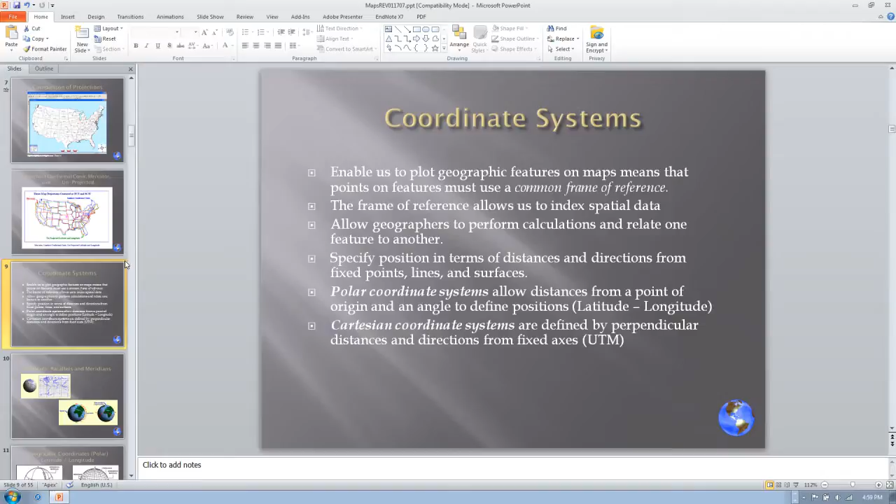There are 2 different coordinate systems that we work with in GIS. The first is polar coordinate systems, and the graticule that we see on globes today was developed by the Greeks, and it enables us to plot points in degrees of latitude and degrees of longitude - latitude north-south, longitude east-west - for any point on the planet.

And if you have 2 points, you can hypothetically calculate the distance between them, hypothetically meaning if you knew how to do the trigonometry involved. That's a complex calculation because lines of latitude run east to west - latitude is a north-south direction, and they're parallel. But lines that demarcate longitude run north-south, they're called meridians, and they converge at the pole. So just knowing that, a degree of longitude at the equator is its greatest distance, and as you move north or south from the equator, a degree of longitude decreases until you get to the pole, where all those meridians converge and a degree of longitude is basically nothing.

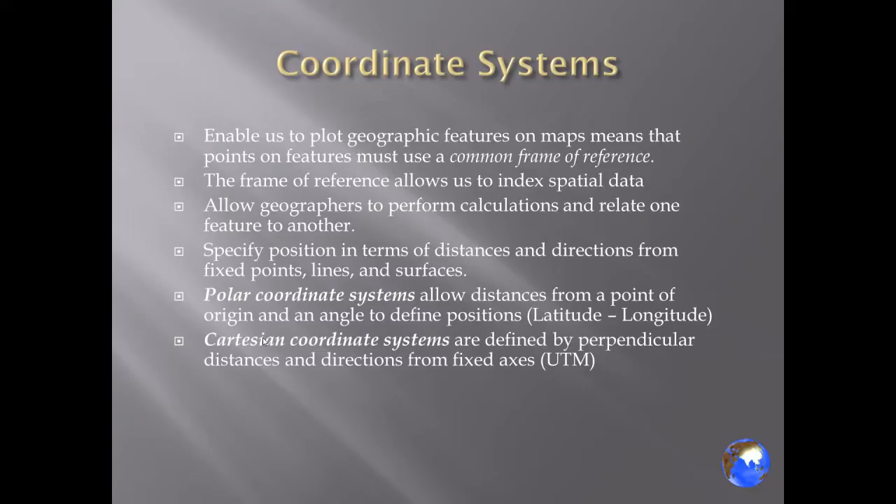The other coordinate system we use is a Cartesian coordinate system like UTM. They are defined by perpendicular distances and directions from a fixed x and y axis - you remember this from your good old geometry days. The x-axis for UTM is substituted by easting, that's the horizontal. The north-south axis, the y-axis, is northing. So we can plot points as long as we have an x and a y, an easting and a northing. We can plot those points.

Moving to this slide here, you see 1 degree at the equator is 111 kilometers or 69 miles using latitude and longitude. By the time you get to Washington, D.C., it's 88.8 kilometers or 55.2 miles. So therein lies the geometry and the trigonometry you need to calculate that.

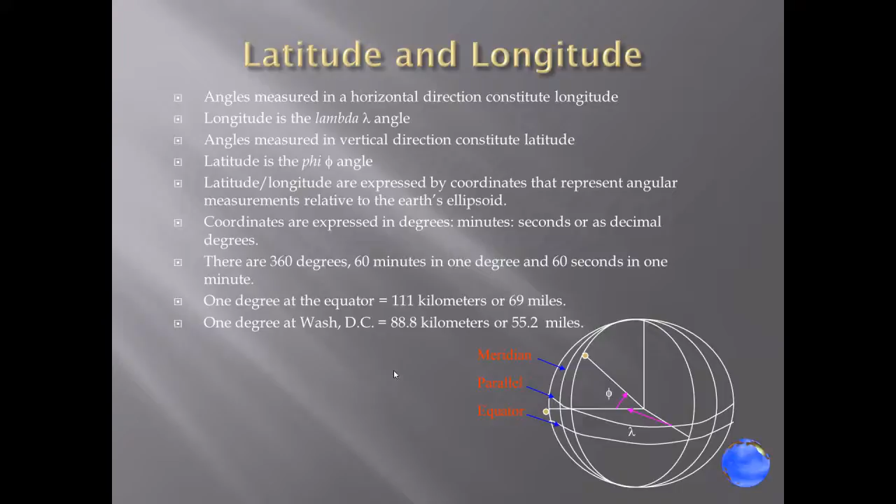This is a universal transverse Mercator grid. There are 60 zones running from east to west, and they run from approximately 80 degrees north to 80 degrees south. They're vertical in nature, and here's Alabama - we are in zone 16. Here's the Yucatan Peninsula, you'll see it's in 16 and part of it's 15.

Northing is meters north of the equator. In the case of Dzulá, it's 2 million some odd meters north. That means if your stride was 1 meter, you'd have to take a little over 2 million steps to get to that point. Very simple and straightforward.

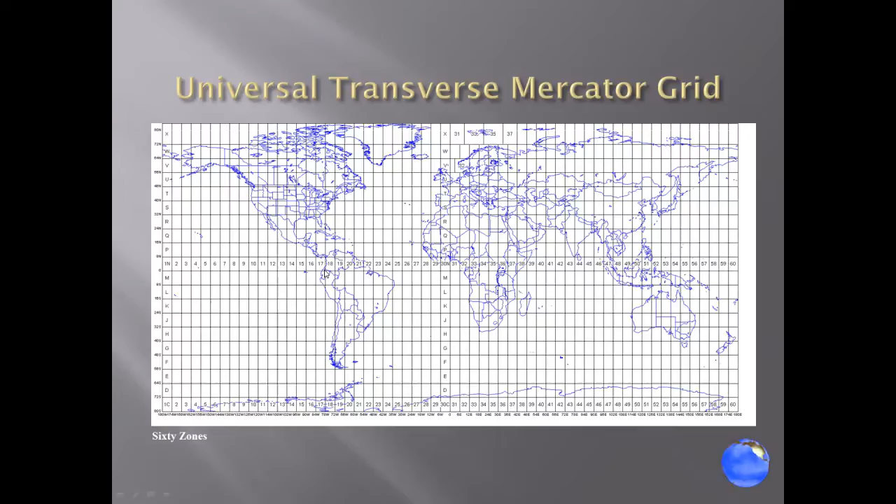The other rule of thumb is that easting increases as you move east and decreases as you move west. Northing increases as you move north and decreases as you move south. By the way, if you're in the southern hemisphere, this is considered 10 million instead of 0. So northern hemisphere, it's 0 and counts upward. Southern hemisphere, we start at 10 million and subtract off. That's Universal Transverse Mercator. I think that's enough of that.

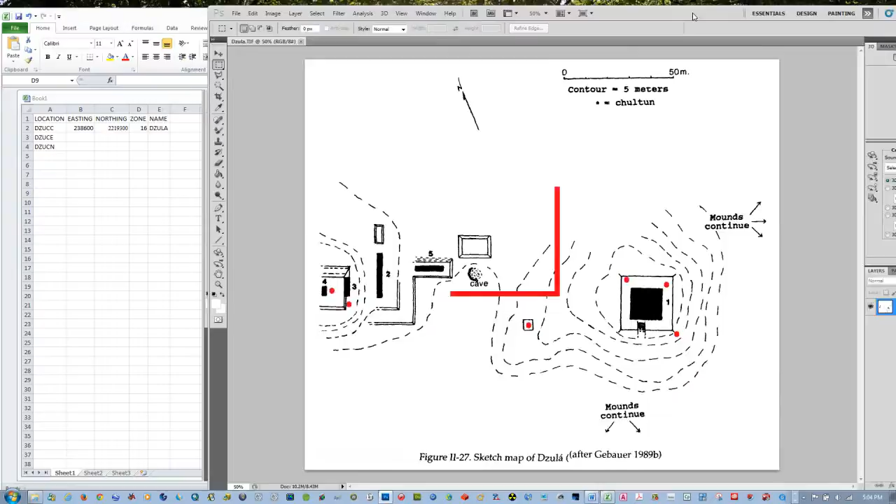Let's take a look at Dzulá. I know I have that open. There you go, I'm going to have to scoot some of this stuff out of the way so you can see this. Okay, maybe we'll be able to see this. Let's see, a little bit more. Okay, so Dzulá center: 238,600 east by 2,219,300 north. That's that point right there.

If we want to know the easting for this point, which is Dzulá north, we're not moving any additional meters east or west of this center line. So the easting for this point up here is going to be the same as the easting for center, center. So I'm going to go down there and type 238,600. The northing for this point, remember the scale is 50 meters, so the northing for this point is an additional 50 meters because we're walking north. There's your scale bar. So the northing would be 50 meters more than 2,219,300, so it's 2,219,350. That's the northing. This should plot a point right here.

The Dzulá center easting—okay, if we're going from this point, traveling to this point, and this is north, then that has to be west. If this line is 50 meters, then going west 50 meters means we have to subtract 50 meters off of the easting of the center. So 238,600 becomes 238,550. Are we moving further north or south? No. So the northing for this point right here is going to be the same as the northing for that point right there, which is 2,219,300.

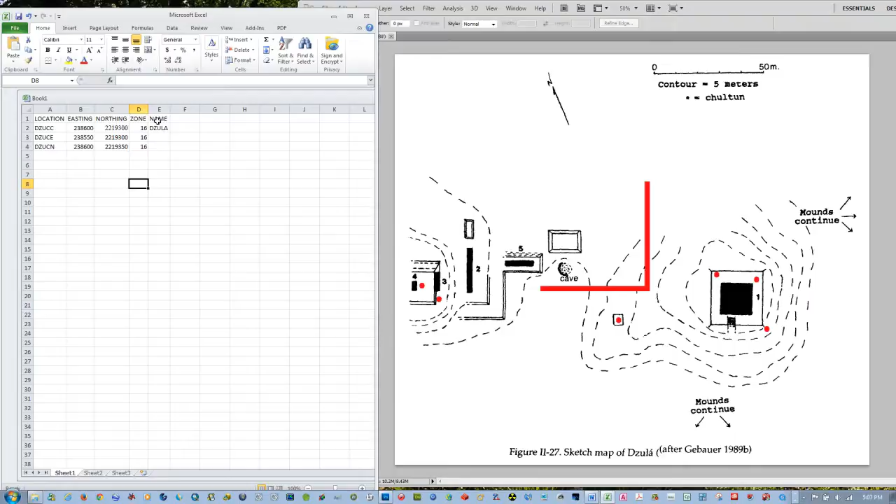Okay, we'll type zone 16 in all of them. We're not going to use that for a label, we'll need Dzulá. Okay, I think we're ready to geocode this. So I'm going to close this and label my sheet Dunning.

Let's make it Dunning underscore sites. Sheet 2 I'm not going to use, so I'm going to delete that, and sheet 3 I'm not going to use, I'm going to delete that too. We need to save this, but we need to file save as. You all know GeoMedia will only take Excel 97-2003, so we want it in that format, and we want to put it in our folder for Lab 8 on the C drive. So we go to Lab 8, and let's call this one Dunning. Okay, so we should be good to go.

This should work, hopefully. And by the way, you need to close this to attach it. Okay, let's open up GeoMedia.

We're going to open up a blank Geo workspace, and we're going to make a new connection. We're going to connect to Yucatan. Browse, go to the Lab 8 folder, Yucatan 3 MDB. Okay, let's go ahead and display country.

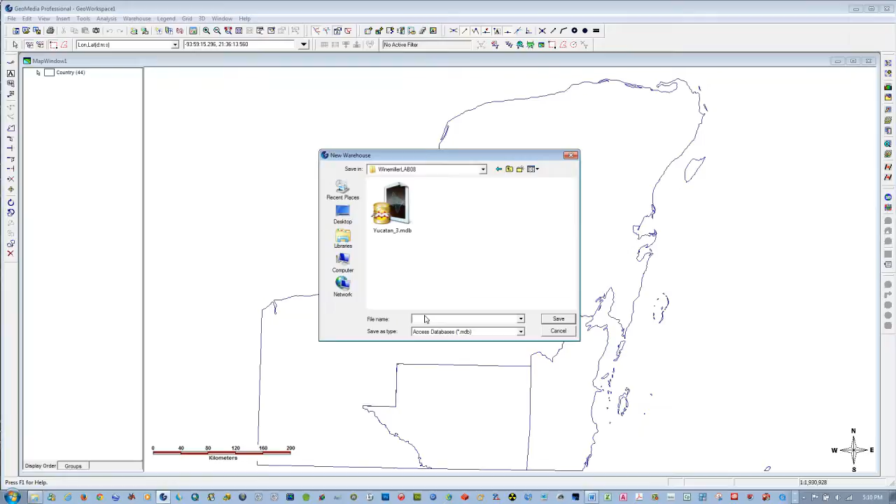Now what we want to do when we geocode coordinates, we have to attach a spreadsheet. We could actually key in coordinates, but that's not really the best way to do this. Let's go ahead and attach the spreadsheet. We do that by going to Warehouse, Feature Class Definition, Dunning, Attach. Here, when we attach, it always asks what format of data we're attaching.

It's Excel 97. We'll browse. We have to go to the Lab 8 folder and pick up Dunning XLS. And there it says Dunning Sites. That's why I deleted all those other worksheets.

I don't know why it puts that little tail on there. Well, I do, it's an underscore. If you have 2 or 3 sheets that are named the same, that underscore will be followed by a numerical value for the number of sheets. So we're just going to attach Dunning Sites.

If you want to see what it looks like, we can go to Edit, Attributes, and there's the attributes. It has a location, an easting, a northing, a zone, and a name. That's a text feature. So everything so far is pretty good.

Now what we need to do is geocode those coordinates. So in order to do that, we go to Analysis, Geocode Coordinates. Geocode attributes in, we want to pick the spreadsheet. Here, the first time you geocode coordinates using UTM, you have to check the coordinate system.

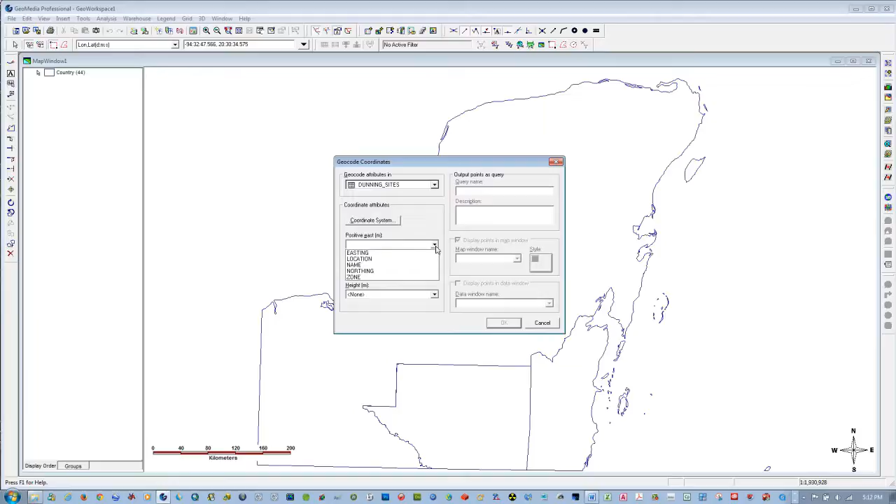Now you'll notice that instead of latitude, like when you're geocoding schools and churches, it's asking for positive east meters. Easting, that's easting. Positive north meters is northing. Now we got this green dot, let's change it to red.

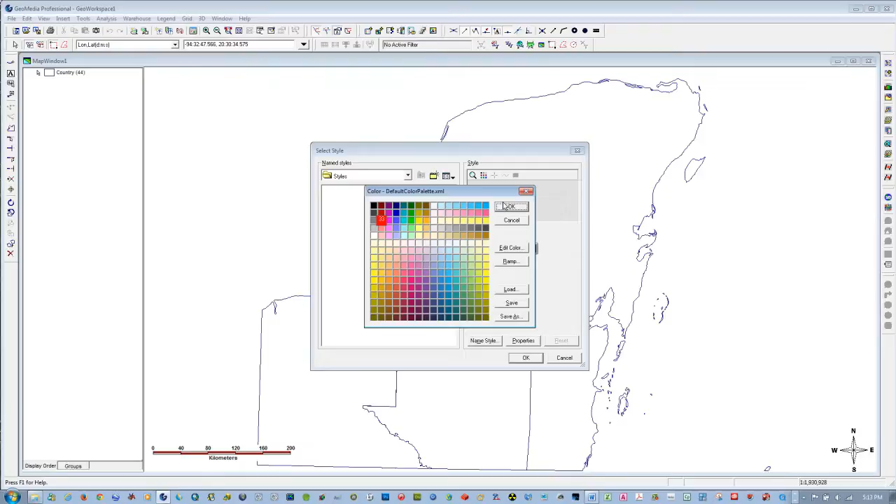And we're going to display it in the map window. We really don't need to see the data window. And voila, there's the points.

Now, if we would zoom in here, we would see that they are in the configuration of the scale center that I put in the map. In order to do that, let's just go ahead, display all on the country, and fit all. And you'll notice we have 3 points, and they're in the right position.

There they are. So we could actually move that over. If, in fact, you do this and you find out that this point is down here when it should be up here, or this point is over here when it should be over there, you made an error in the calculation of northing and easting.

Be cautious of these maps because some of the maps have a 50-meter scale, some of them have a 100-meter scale, and some of them have 20-meter scales. So you have to be aware of that when you're doing the addition.

These are correct. So now I need to get Dzula interactively in here. To do that, insert, interactive image, browse. We're going to go to the C drive, Lab 8, and I'm going to pick Dzula TIFF.

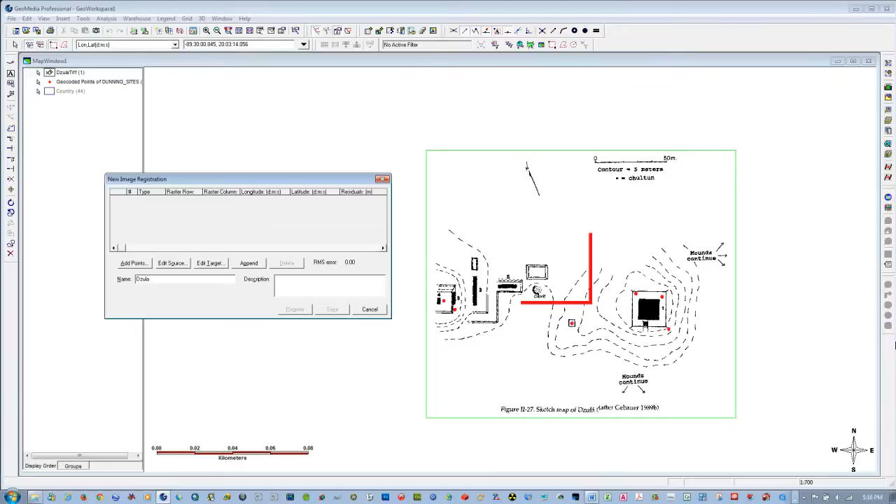I believe in the lab, I'm asking you to do 4, georeference 4, maybe. You might want to georeference all 10 of them. I believe there's 10 of them. There may not be quite 10. Once we have it named, add points.

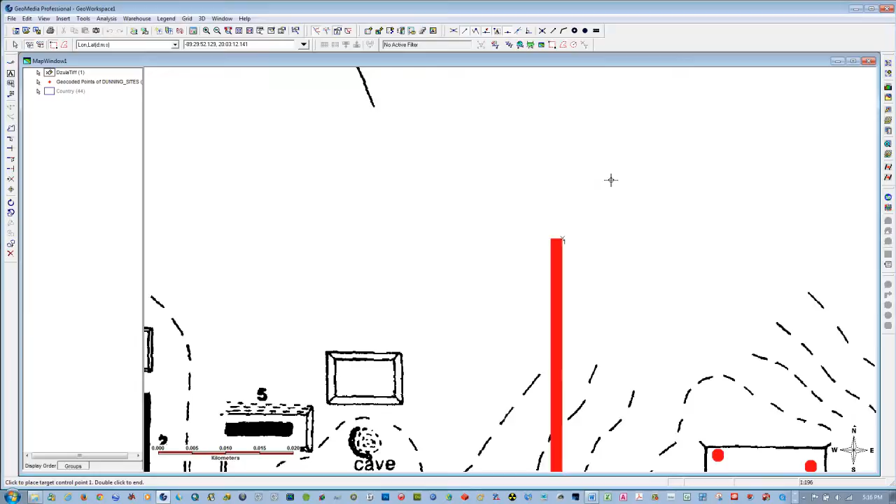Now you notice we have the bullseye crosshair with this snap tolerance. Let's be a little accurate. I zoomed in, right click, and I'm going to get right there. Left click once. That's my one, fit all. And I don't even have to zoom in. Watch this, I just get near there and I get that A. It's going to snap onto that point, it's within snap tolerance.

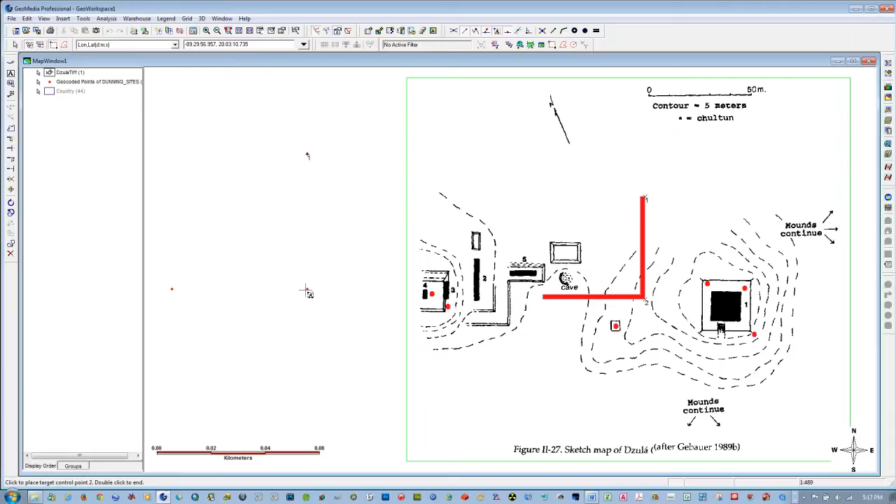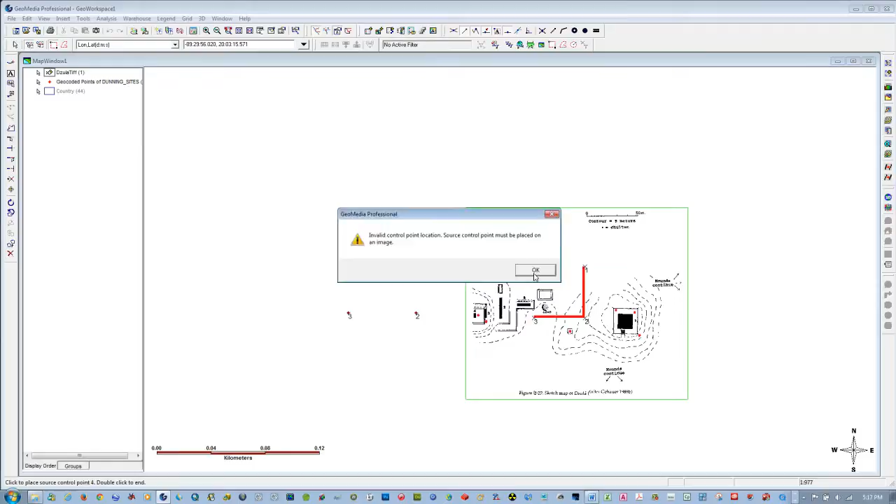The next one, that's 2, don't have to zoom, there it is. 3. Fit all. 3. Okay, I'm going to zoom out a little bit. Right click, double left click in the white space. I had a little spastic click there.

You're never going to get a residual with only 3 points. It has to have 4 to calculate residuals, so the residuals look super. They're 0. Everything looks good.

Let's go ahead and register. The map popped over there. Let's change the color of these points to blue and push them up above the map and see how good we did. Look at that, perfect. So now this is georeferenced.

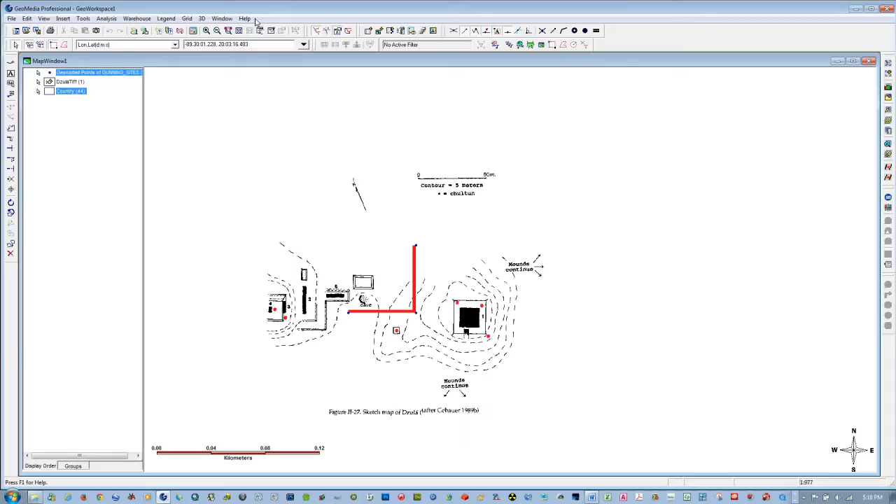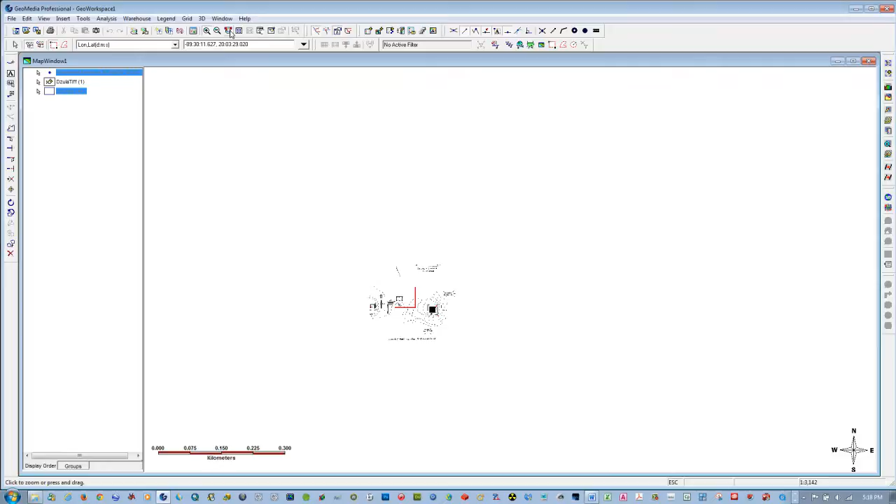We could turn back on the country and fit all, and you'll notice that Dzula, in fact, the map is covered by the point features because they do not change. But if we zoomed in, ultimately we'll see Dzula. Okay, so let's display off there, fit all. And now I'm right clicking, or escaping, to get out of zoom feature.

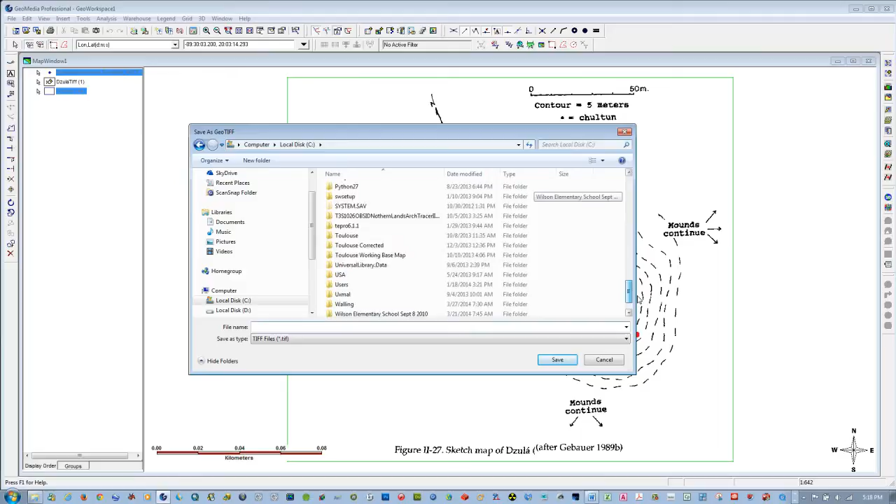I want to make this a geotiff, so I left click, it's highlighted, warehouse, output to geotiff, and we're going to go to C drive. It was going back to lab 6, that's the last time I did that. And it is Dzula, so why not just click on Dzula once, left click, and call it Dzula GeoTIFF

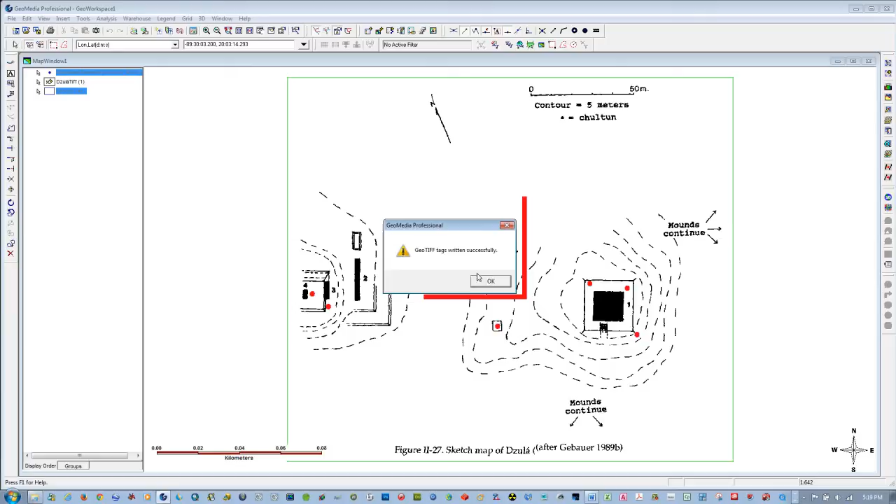and save. GeoTIFF tags written successfully means that it was output okay. If you get an error message that says output of GeoTIFF is not supported by this projection, go in and change the projection to something else. UTM is a safe one. I believe Albers equal area is a safe one. Cylindrical equirectangular is probably the one that it doesn't support, is unsupported. Why is it unsupported? Because it's not able to do the trigonometry involved in warping this feature.

Okay, I'm going to turn this feature off, and I'm going to insert a georeferenced image. Automatic is the mode, you don't have to. You could change the geotiff, but leave it automatic, that way it recognizes anything. Browse to the C drive, go to Lab 8. Only click the folder and go OK. And here's Dzula geotiff highlighted.

Arrow to the right. If you get a warning message here, it's not a geotiff. We're going to put it in Dunning, and we want to call it - see, DzulaTIFF is already up there, that's the last image we interactively replaced. So we want to name this something else, and it's Dzula GeoTIFF. And add a new legend entry. If you don't check that box, nothing will happen. You can apply to see your work, and OK or close. And there you go, so now that's in there.

So we've georeferenced, we've taken a map, a sketch map that had no geospatial value in a GIS. We innovatively calculated 3 points of UTM coordinates, and we were able to georeference this.

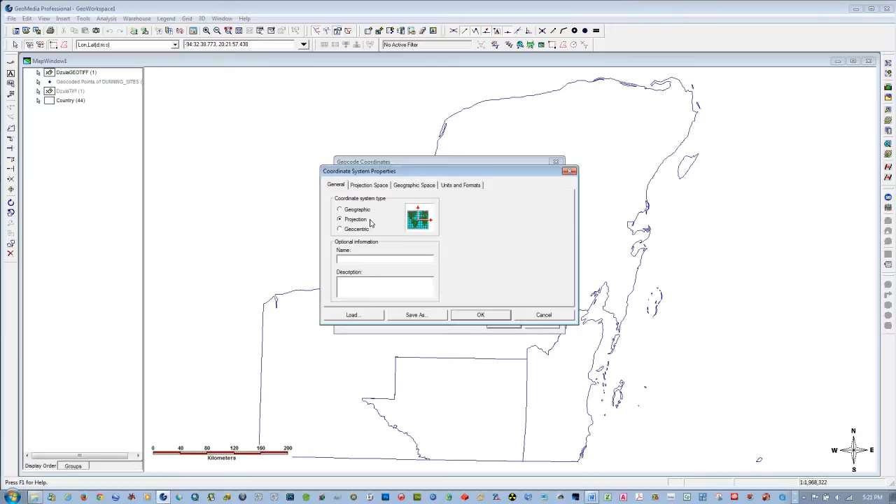I'm going to geocode the same coordinates for Dzula, but I'm going to make a mistake and geocode them with the wrong UTM zones so you can see what happens. So I'm going to go to Analysis, Geocode Coordinates, Dunning Sites. Now you notice I've got to click on the coordinate system in the projection space, projection parameters.

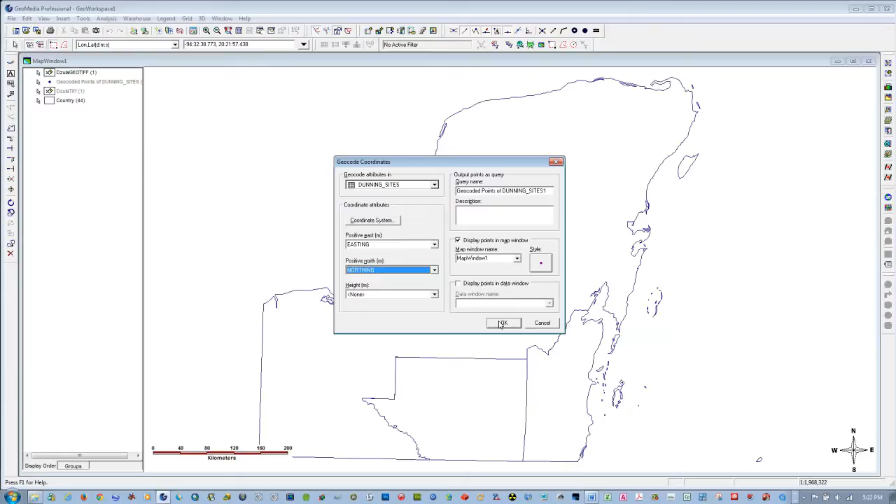I'm going to take this back to 15. Okay, let's select the easting, select the northing. Remember, there's a redundancy here, and there'll be that. Let's click OK and fit all. And you'll see here's where they are, they're over here now in zone 15. So that's the functional equivalent of the northing and easting we have for this particular site down here.

And I'm not going to move them up above because I'm going to show you how to fix some errors. Well, let's actually just delete this.

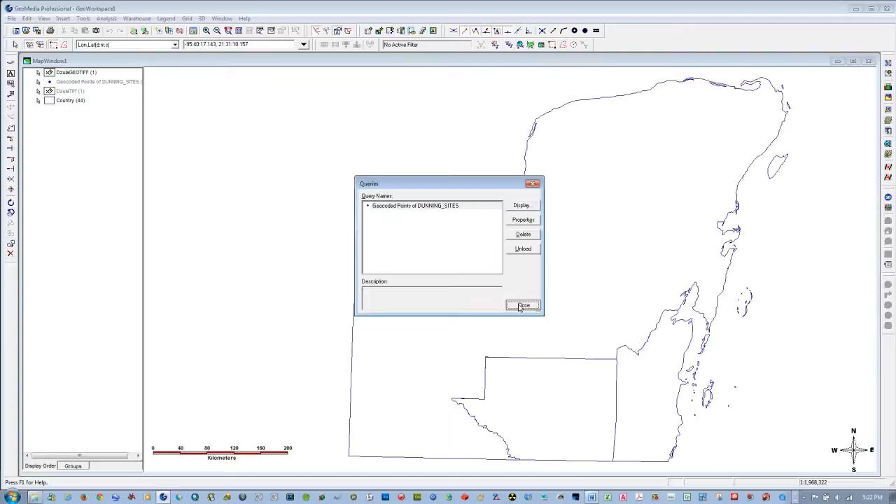And that's a query. So if we went up to analysis queries, this is it right here. I'm going to delete this. Okay, close. Now what I'm going to do is I'm going to push these up here.

So there's our points. I'm going to go in here and show you the map. Okay.

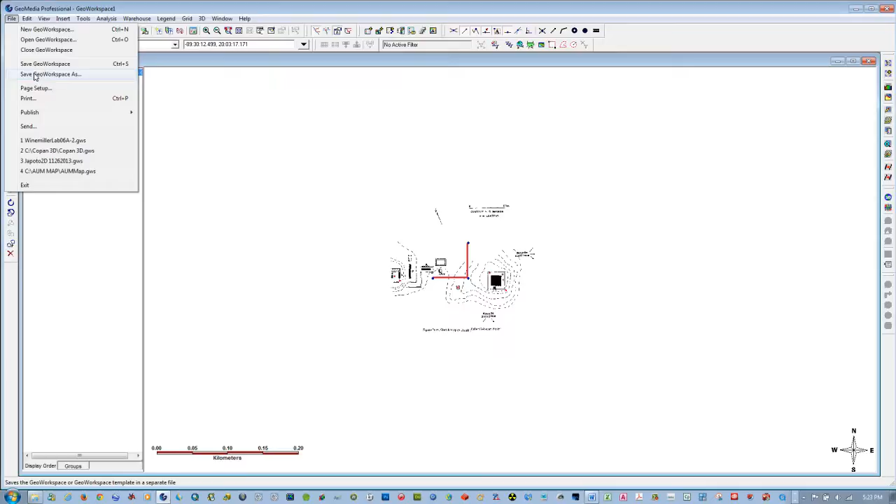What I'm going to do is I'm going to save the Geo workspace. So File, Save Geo Workspace. Let's put it in our folder. It's got to go in the Lab 8 folder.

And you're going to call it, well, you're not going to call it Winemiller. I am. Lab 8.

Okay, so it's saved. Now what we want to do is I'm going to change the easting of this point right here. I'm going to add 50 meters to it.

So we're going to close this. I'm going to go into the folder. I'm going to open up Dunning Sites. And that was Dzula North.

Instead of 350 - oh, that's northern. Easting, I'm going to make this instead of 600, I'm going to make it 650. Just to impose, to insert a mistake in there.

And I'm going to close this. Now I'm going to double left click and open up GeoMedia again. Now you'll notice that that point moved over to here.

This demonstrates a couple things. One particular situation that it demonstrates is that when you have attachments in GeoMedia and you go through any kind of analytical function like geocoding coordinates, whatever, when you launch GeoMedia, the Geo Workspace, it goes through and accomplishes all of those tasks in order every time you open it.

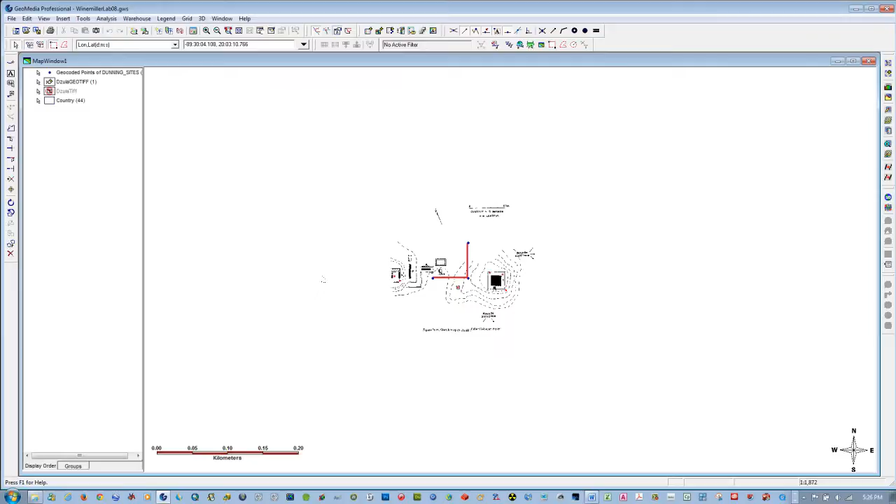Save it again. So if you do make a mistake, they're not fatal. So it's back where it belongs. Okay, I'm going to File, Save GeoWorkspace, turn on the country. It's already on, fit on,

And there you go. So you saw, you notice that there's a redundancy issue with UTM coordinates. You can make mistakes. You need to know what zone you're in, especially in an area like Yucatan, where in fact, if I draw this line down through there, that's about the boundary between zone 16 and

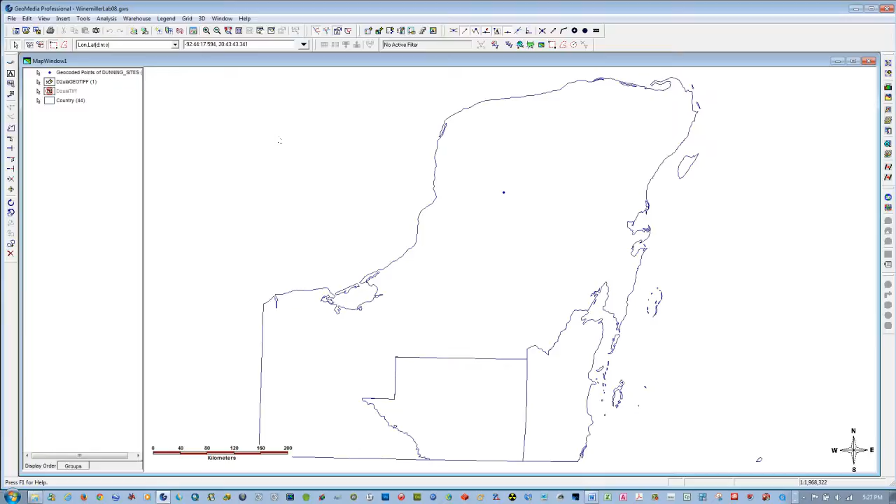zone 15. So there are archaeological sites in 15, and you would have to do something about that, probably geocode them separately using a separate spreadsheet to get everything to work out properly.

So that's the lab. I've already saved it. I've got everything in here. I'm going to take this maps, um, and I'm going to, well, I thought I was going to. I'm going to, hello. I'm going to take these maps and I'm just going to delete it.

And go back to Winemiller Lab 8. So C drive, right click, send to compressed folder. You may have to let this do this on the C drive. That's the folder you send to me. If I double left click on it, inside is a folder.

I want a folder, one folder inside, and then all of your work in here. I have the Geo workspace. I have the Dunning XLS. If I sent this to me, I'm a lonely person.

If I sent this to me, I would get an email and I would have an attachment. I could open it up on any C drive on any laptop that has this software, and everything would work out fine. So that is the demonstration for Lab 8. Enjoy.